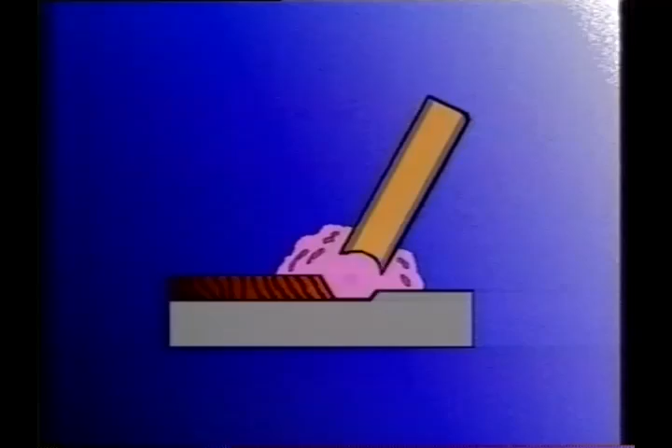To make it easier to locate subjects for review, we've divided this video presentation into 7 sections. First, we'll be looking at the items that are included with the machine and what equipment and supplies you'll need to provide. Next, we'll review the principles and basic theory of gas tungsten and shielded metal arc welding. In the third section, we'll discuss safe welding practices and safety equipment.

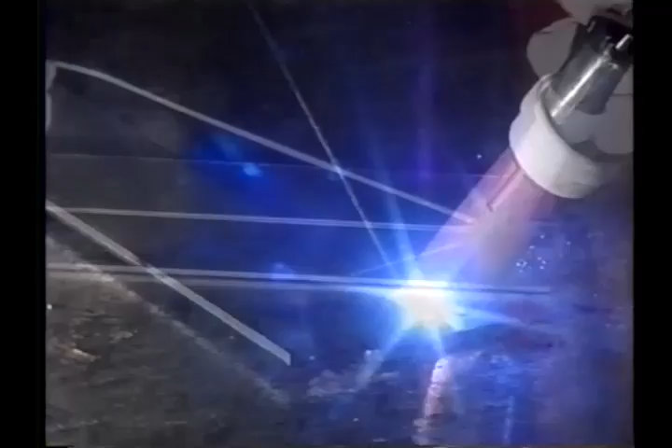In Part 4, we'll set the equipment up, first for gas tungsten and then for shielded metal arc welding. In Part 5, we'll discuss gas tungsten arc welding procedures on mild steel, stainless steel, and aluminum. In Part 6, we'll cover basic shielded metal arc welding techniques. And finally, in Part 7, we'll be discussing equipment maintenance and troubleshooting procedures.

The Miller EconoTIG package includes practically everything you'll need to begin welding. Included is the welding machine itself. The TIG torch has a unique flow-through shielding gas connection. This lets you connect and remove the TIG torch without using any tools. The torch comes with a nozzle, heat shield, collet cap, 3/32 collet and collet body, and a 2% thoriated tungsten electrode. The foot control is used to remotely control the amperage when gas tungsten arc welding and has a 15-foot

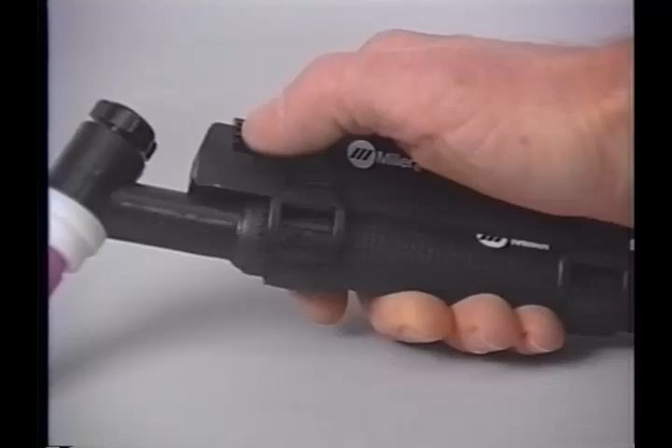cable. For increased mobility, an optional current and contactor control is available that connects to the torch and is fingertip control. The argon regulator flow meter, 12.5-foot gas hose, 12-foot work cable and clamp, and stick electrode holder complete the package. For gas tungsten arc welding, you'll need to provide a cylinder of argon shielding gas. And for shielded metal arc welding, you'll need electrodes suitable for your job.

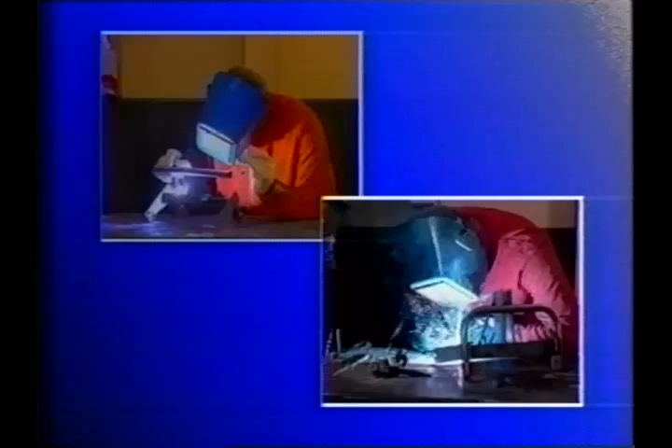In all electric arc welding processes, the heat for welding is created by an electric arc. In shielded metal arc welding, the arc is established between the end of the electrode and the base metal. The heat melts both the end of the electrode and the base metal. As the electrode melts, it flows into the molten weld joint as filler metal.

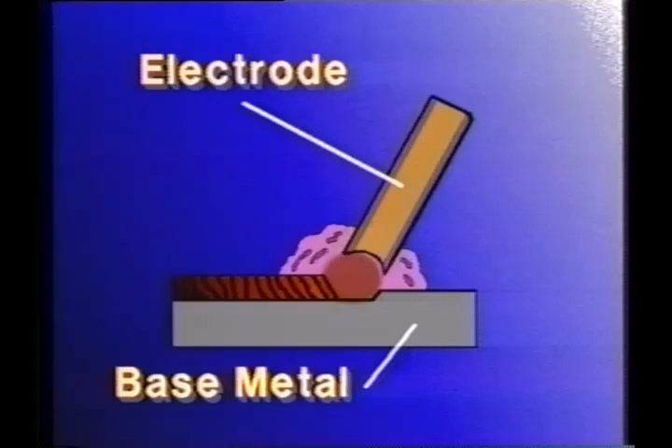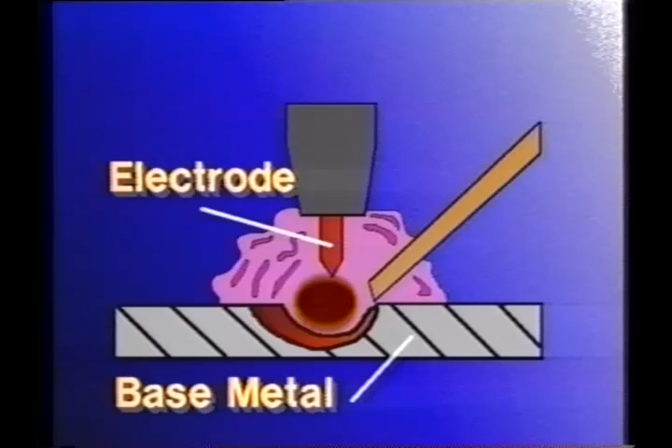In gas tungsten arc welding, an arc is maintained between the tungsten electrode and the base metal. However, the tungsten electrode is not consumed in the weld. On joints where filler metal is required, a welding filler rod is fed into the weld zone and melted with the base metal.

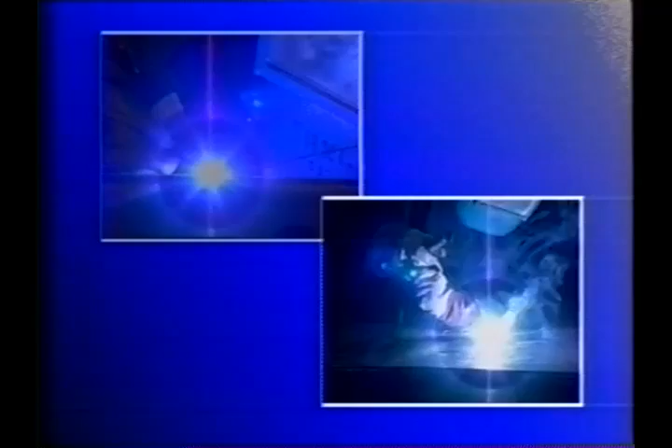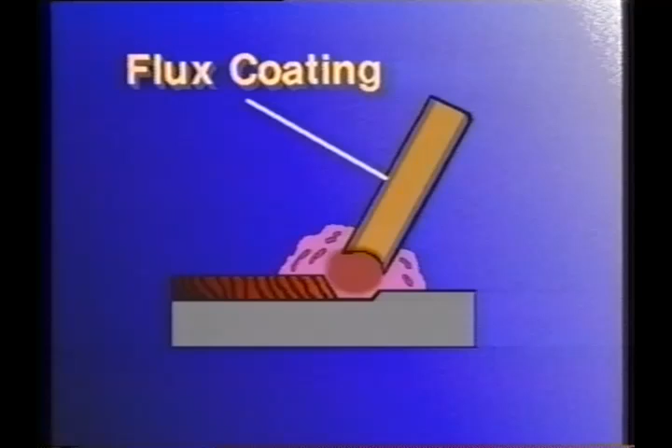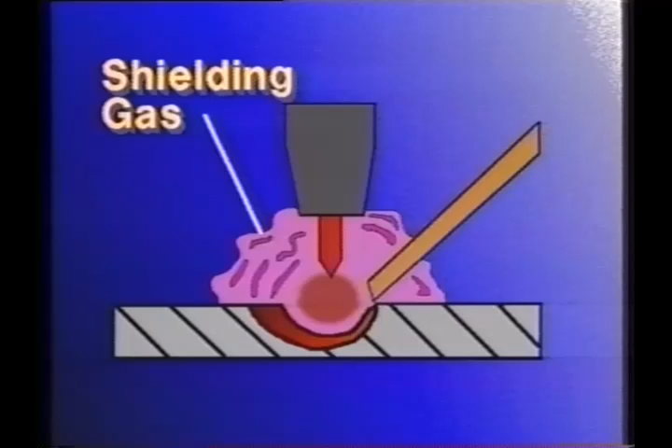In any type of welding, the molten weld puddle must be protected from the atmosphere. Otherwise, oxygen and nitrogen will combine with the molten weld metal and result in a weak, porous weld. In shielded metal arc welding, this is accomplished by the flux coating on the electrode, which melts and creates both a shielding gas and a slag covering for the deposited weld metal. In gas tungsten arc welding, argon, which is an inert gas, is used to shield the welding arc.

When the remote control is activated, the arc is initiated, and at the same time, the gas solenoid in the welding machine opens. Gas flows from the cylinder, through the regulator flow meter, through the gas solenoid, through a hose in the torch cable assembly, and out the nozzle on the torch. When welding current is shut off with the remote control, shielding gas continues to flow for 15 seconds to cool the tungsten electrode and protect the molten weld puddle while it solidifies.

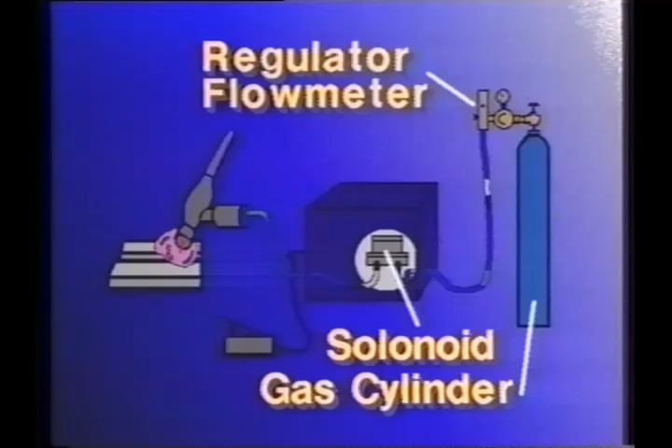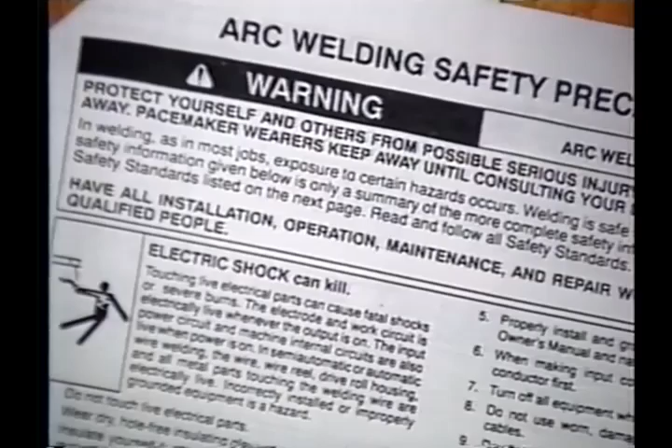Welding is safe when proper precautions and work practices are followed. However, as in most jobs, there are certain hazards you must be aware of. The safety section in the owner's manual outlines precautions that must be taken regarding electric shock, arc rays, fumes and gases, fire or explosion, flying sparks and hot metal, and proper handling and use of shielding gas cylinders. The owner's manual also has a listing of booklets available from various sources regarding safety.

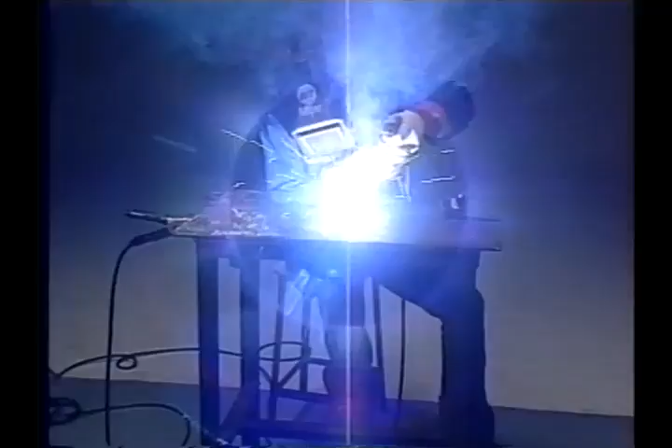The welding arc supplies both heat and light to the work area. The heat is for welding. The light is only incidental. However, it can seriously damage unprotected eyes, so never look directly at a welding arc without proper eye protection.

A welding helmet with a number 11 safety lens for welding on aluminum or a number 10 lens for steel or stainless steel is an absolute requirement. The darker shade lens is required for welding on aluminum because it reflects more light. Proper clothing includes a long-sleeve shirt buttoned at the collar and wrists. A leather jacket, apron, and gloves will help protect you from arc burns and radiation.

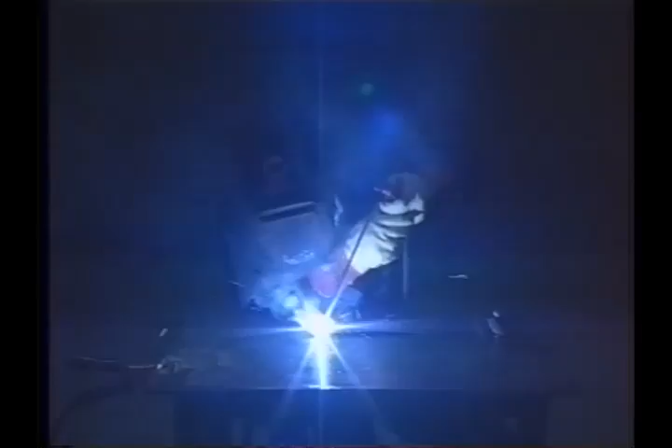Wear high-top shoes or boots and trousers without cuffs. Be sure there is adequate ventilation and that all flammable materials are removed from the welding area. Let good common sense be your guide, and be sure you read and understand all information in the safety section of the owner's manual before setting up or operating the equipment.

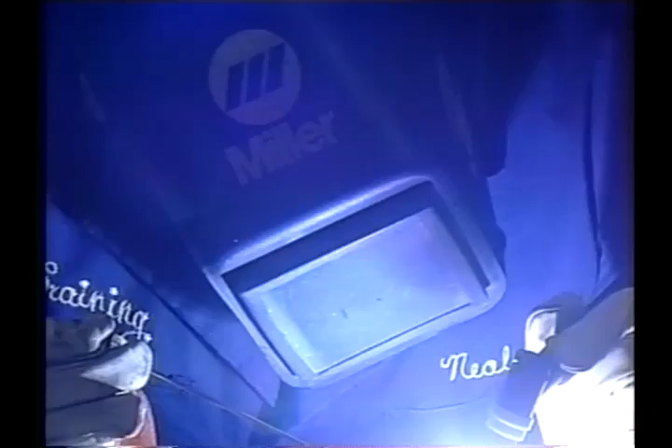In this section of the video, we're going to go through the steps involved in setting the equipment up for welding. First, for gas tungsten, then for shielded metal arc welding.

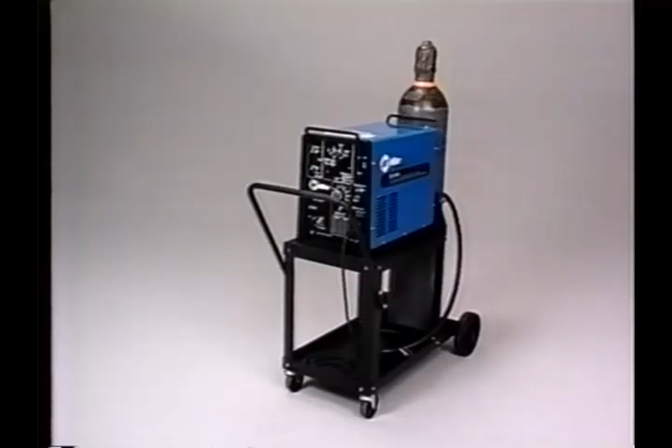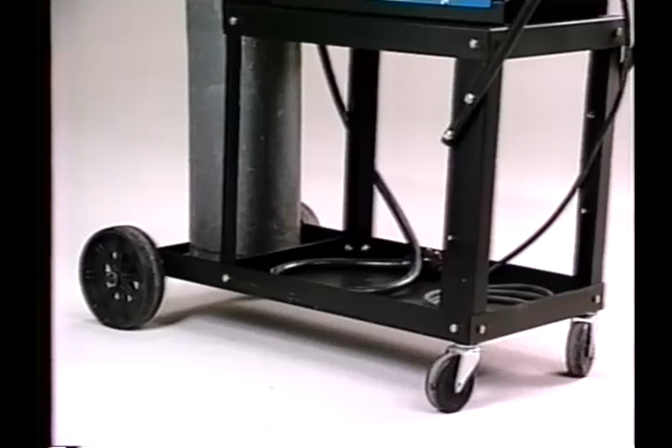We've placed the power source on the optional carry cart and cylinder rack. It makes it easy to move the machine. Plus, there's a cylinder rack support for the cylinder of argon shielding gas, and the bottom tray is convenient for storage. The installation procedures we're going to be covering are outlined in Section 3 of the owner's manual.

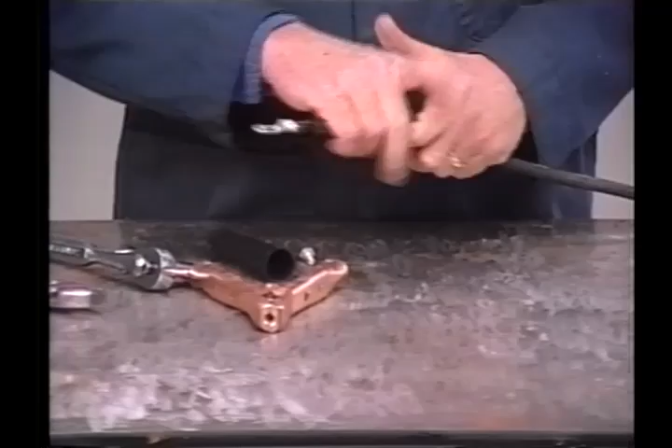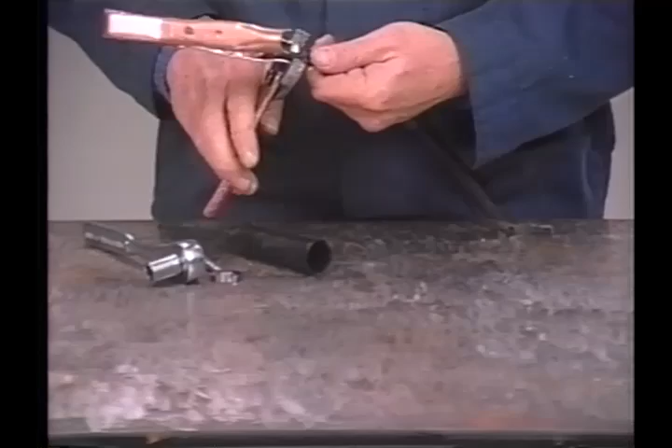To attach the work clamp, slide one of the insulating sleeves over the cable. Use the nut and bolt provided and attach the work clamp to the connector on the work cable. Bend the tabs around the work cable. And slide the insulating sleeve around the work clamp handles.

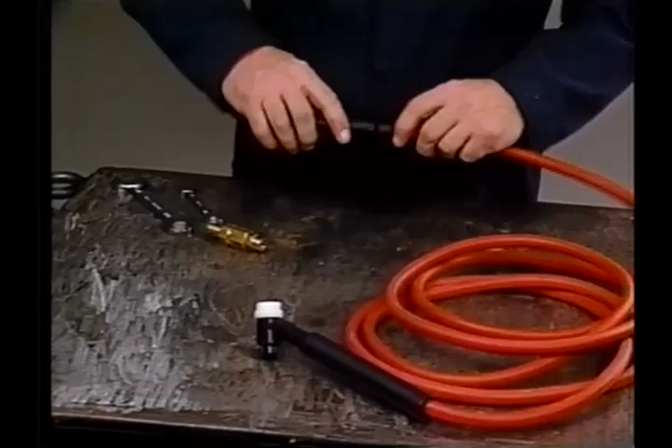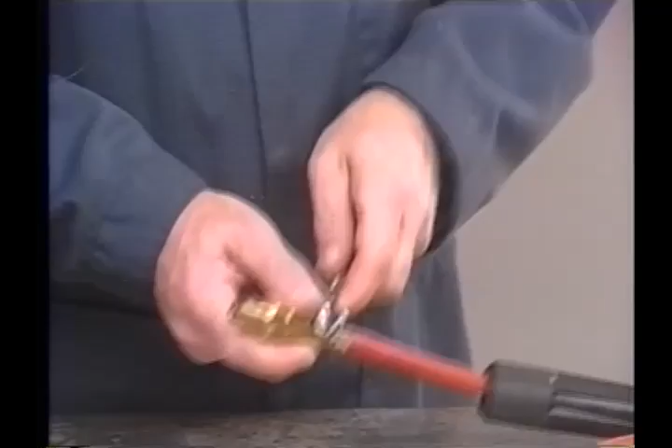You'll need to install the connectors to the TIG torch and electrode cables. Slide the handle over the torch cable. Connect the torch cable to the connector body, and then slide the handle over the connector.

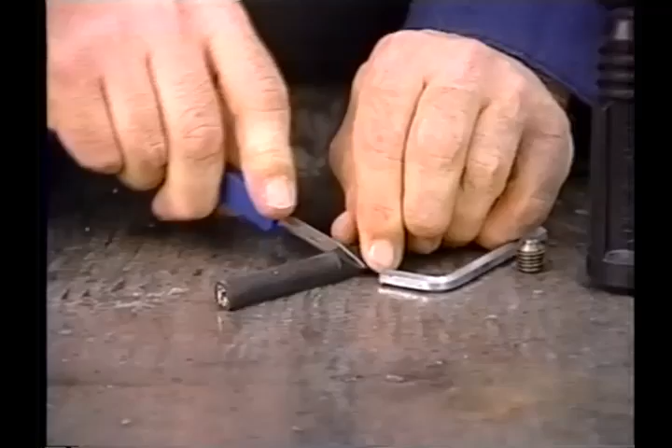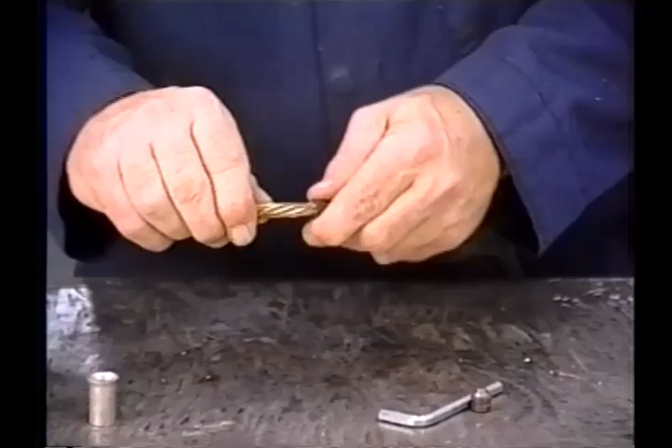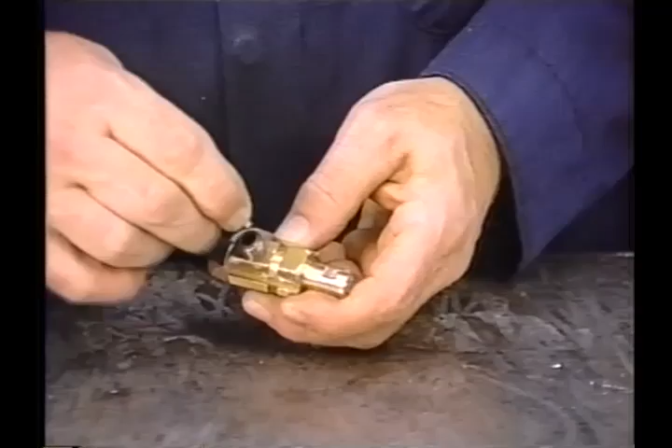The electrode cable connector is assembled in much the same way. Slide the handle over the cable. Strip the cable and install the sleeve fully into the connector body. Tighten the set screw, then slide the handle over the connector.

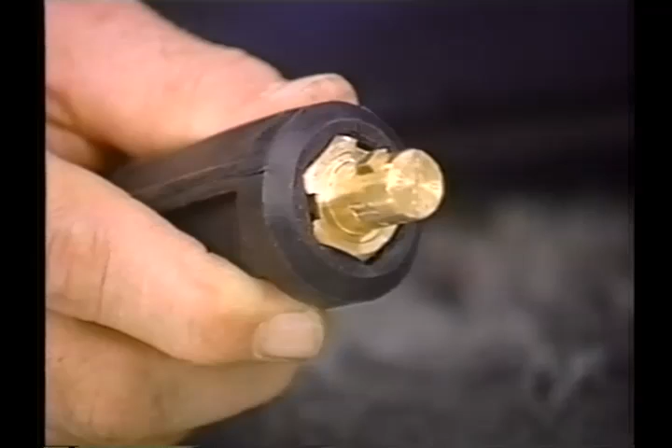When the tungsten is secured in the torch body, it should not extend more than a ½ inch beyond the nozzle. As a general rule, start with an extension of 1 electrode diameter. Joints that make the root of the weld hard to reach will require additional extension.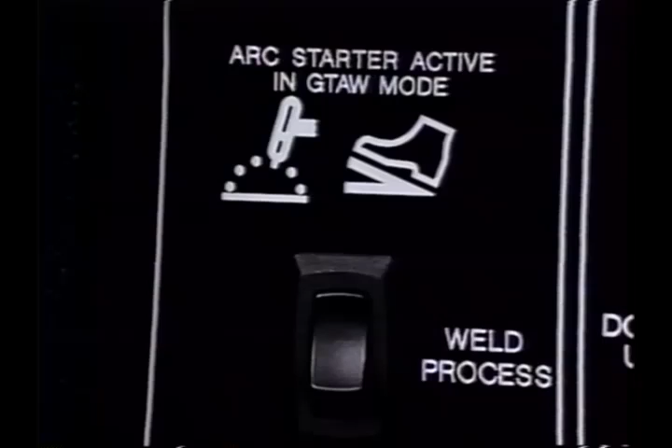For gas tungsten arc welding, the weld process selector switch is placed in the GTAW position. When the switch is in this position, the remote foot or torch-mounted hand control turns on and adjusts amperage in the welding circuit. As the label indicates, the Arc Assist starting system is active when the switch is in the GTAW position. Arc Assist helps start and stabilize the arc. It does not require any adjustment. The remote control is connected to the receptacle on the front panel.

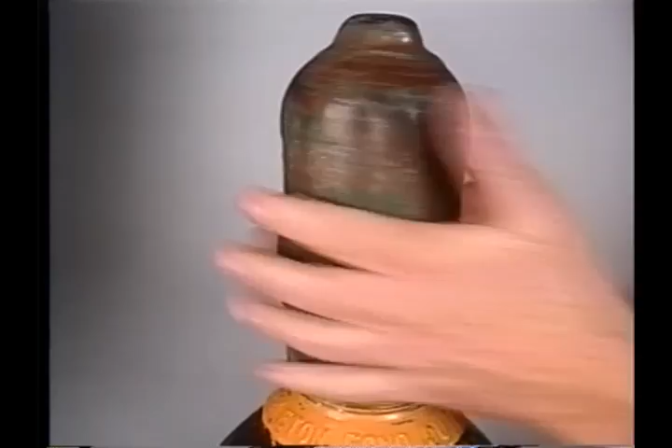Be sure that the gas cylinder is secured to the running gear. Remove the cap, stand to the side, and briefly open the valve slightly. This blows any dust or foreign material out of the fitting. Install the regulator flow meter to the cylinder so the face is vertical.

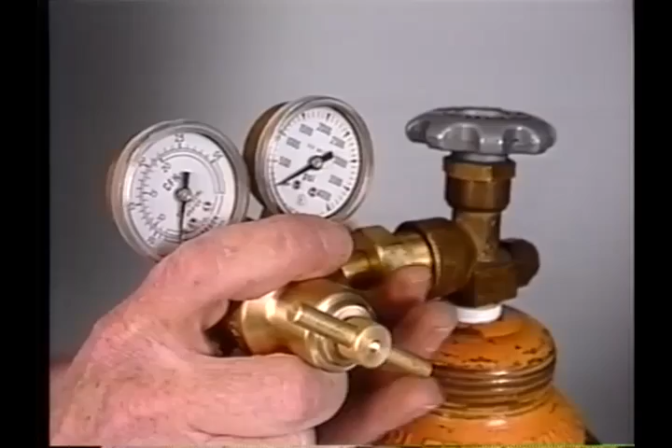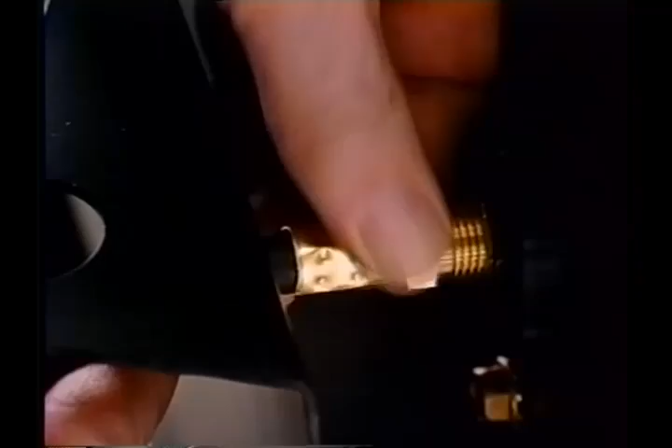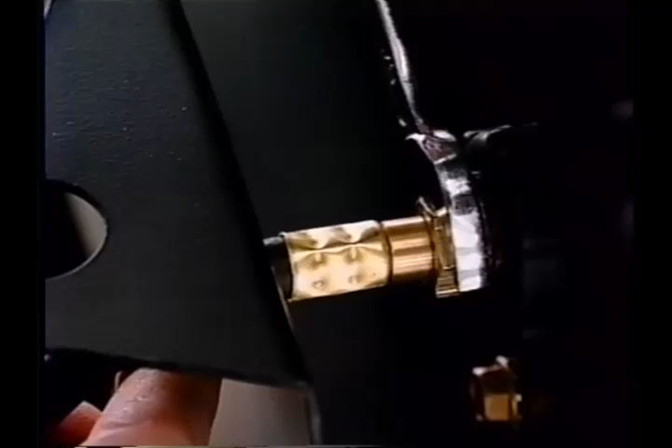Connect one end of the gas hose to the regulator flow meter and the other end to the gas fitting on the back of the machine. Make sure the fittings are tight to avoid gas leaks. The machine is now set up for gas tungsten arc welding.

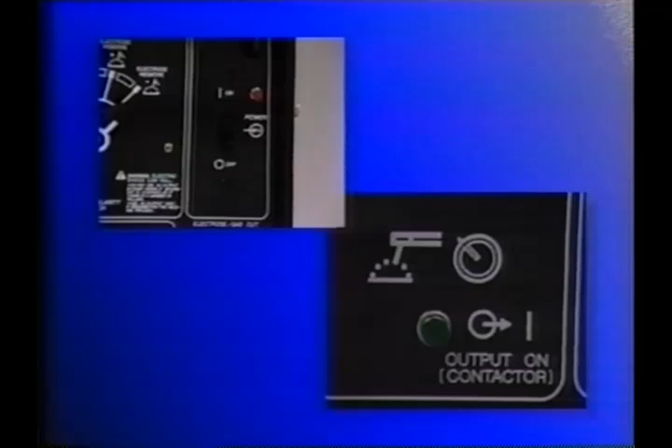To set the machine up for shielded metal arc welding, the torch is removed and the electrode cable is connected to the receptacle on the front panel. For shielded metal arc welding, the process selector switch is moved to the SMAW position. When the switch is in this position, welding output goes on and off with the power switch. And amperage is controlled by the front panel amperage control. We'll be discussing the selections on the range polarity switch in the sections on gas tungsten arc and shielded metal arc welding.

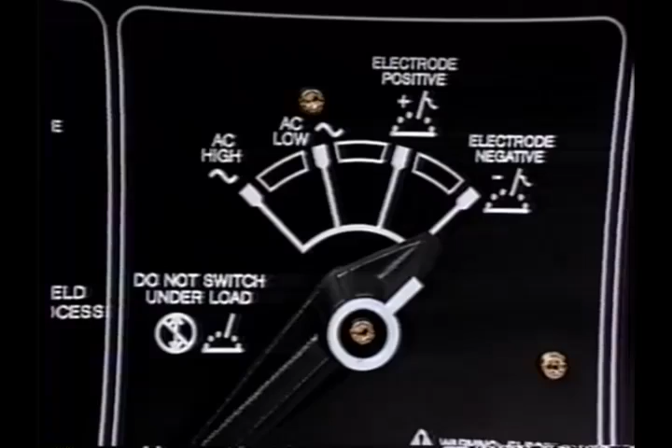In this section, we'll be setting the machine up for gas tungsten arc welding, then making some welds, first on mild and stainless steel, and then on aluminum. The area where the weld is to be made must be clean, and any traces of oxide, dirt, or grease must be removed. Another source of contamination, especially with aluminum, is the filler metal. Use steel wool to remove any oxidation.

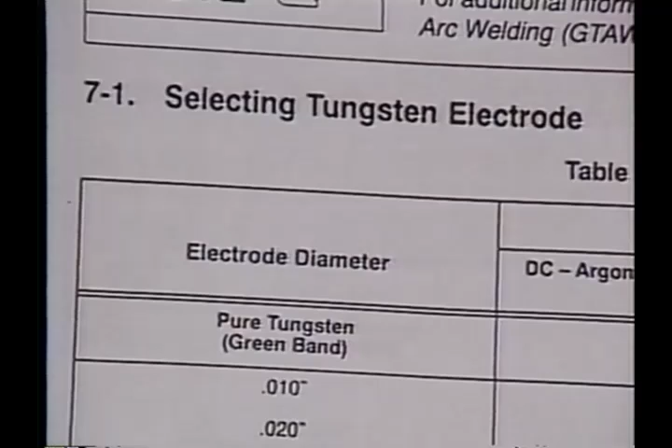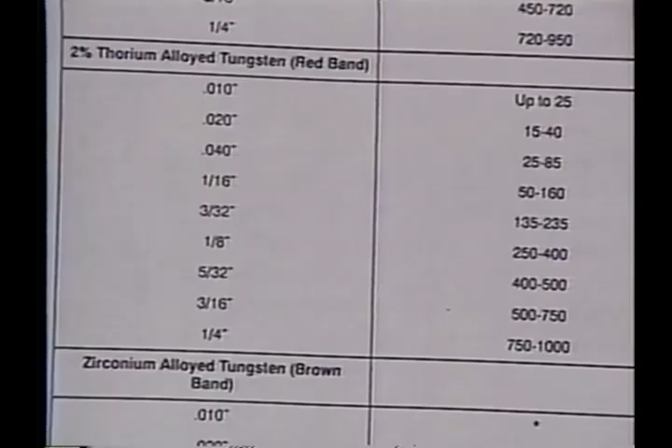The 3/32 inch 2% thoriated tungsten supplied with the torch can be used throughout the AC and DC range of the power source. Generally, alternating current is used when welding on aluminum, and direct current electrode negative is used when welding on steel and stainless steel.

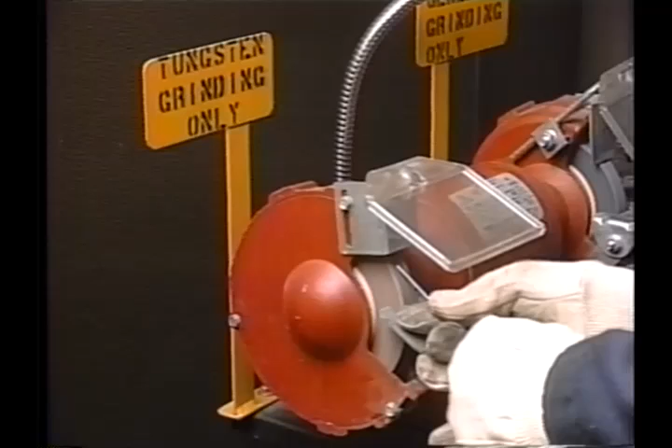The tungsten is prepared based on the type of material being welded. Our first welds will be on steel, so we'll prepare the tungsten by grinding it to a point on a fine grit, hard abrasive wheel. Notice that the grinding marks run lengthwise with the point. This is the correct method of pointing the tip.

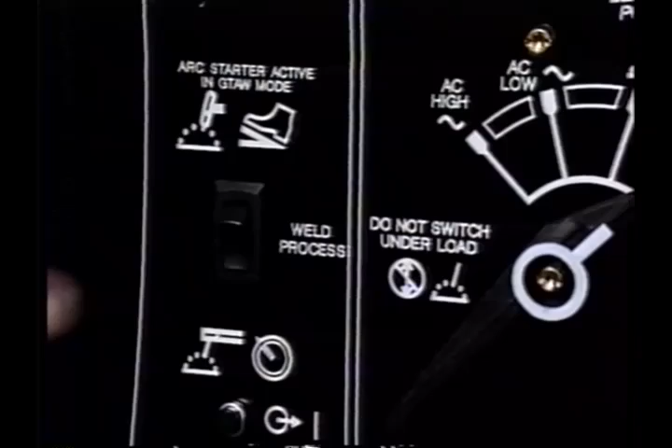Since we're welding on steel, the polarity switch is set to the direct current electrode negative position. The weld process switch is in the GTAW position.

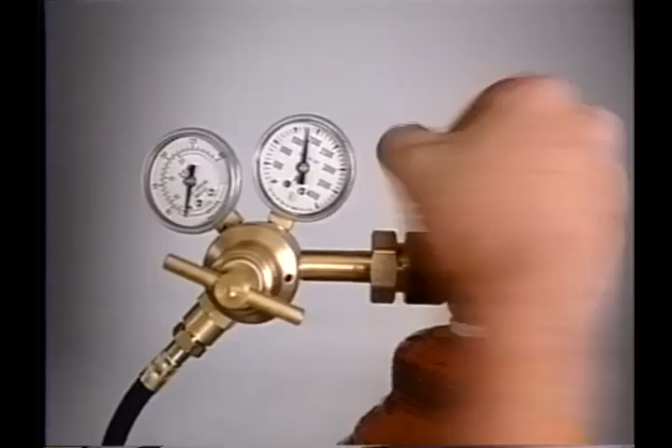Open the gas valve on the cylinder and set the flow meter for approximately 20 cubic feet per hour. You may need to increase this if you're welding in a drafty area. Turn the welder on.

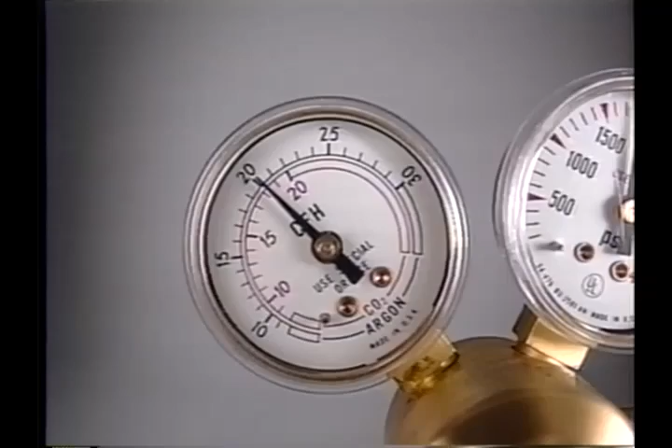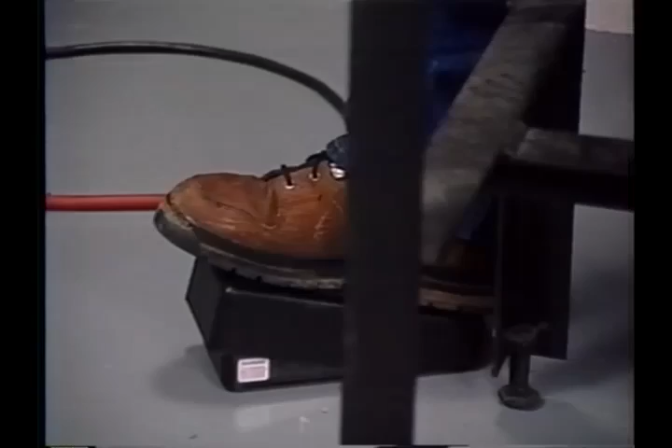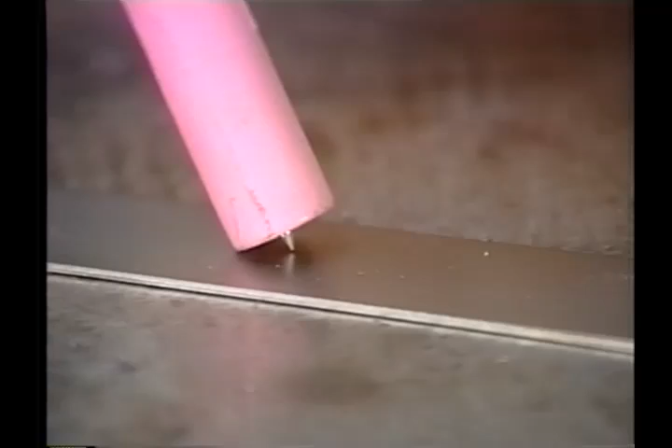To start the arc, position the torch in the joint area. Lower your helmet, and depress the foot pedal or rotate the torch-mounted control if you're using it. If the arc does not start, rotate the cup to move the tungsten closer to the workpiece. A brief momentary touch of the tungsten may be required.

After the arc is initiated, raise the torch to the proper angle for welding. For this outside corner joint, the torch should be at about a 70-degree angle. For this joint on mild steel, filler metal is not being added. Simply control the amount of heat with the foot control and let the edges melt and flow together.

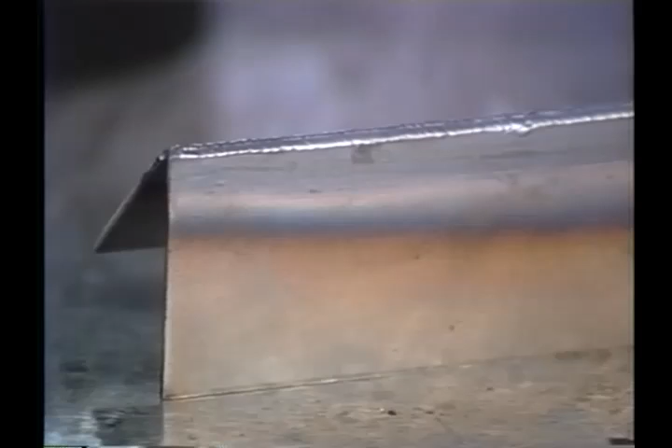Looking at the finished weld, we see that the edges are fused and that the ripple patterns in the bead are uniformly spaced.

On joints that require additional filler metal, such as this mild steel lap joint, establish a puddle of the desired size and begin feeding filler rod into the leading edge of the puddle. Hold the rod at approximately a 20-degree angle so that the tip is heated by the arc, but final melting and transfer of metal occur when the rod is dipped into the weld puddle.

To avoid atmospheric contamination, make sure you hold the hot tip of the rod in the protective envelope of the gas shield.

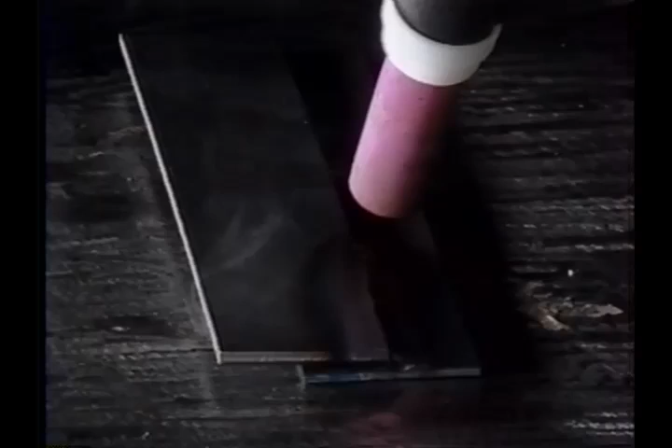Hold the arc length to about 1 electrode diameter and travel at a speed that will produce a bead about 2 to 3 electrode diameters wide.

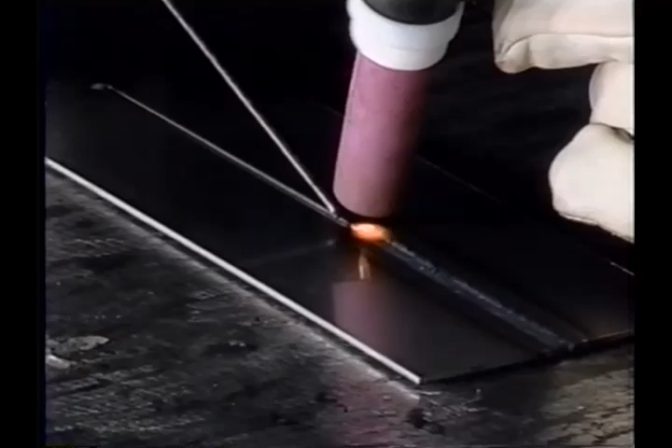To finish the weld, the torch angle may be decreased to help in filling the crater. Add enough filler metal to avoid an unfilled crater, since cracks often begin in a crater and continue through the bead. The ripples are uniformly spaced, indicating correct travel speed, and the bead is the correct width.

Before welding on aluminum, we need to form a ball at the end of the tungsten electrode. This is done by striking an arc with the polarity switch in the direct current electrode positive position. This is the only time electrode positive is used while in the GTAW mode. The ball at the tip should be about 1.5 times the electrode diameter.

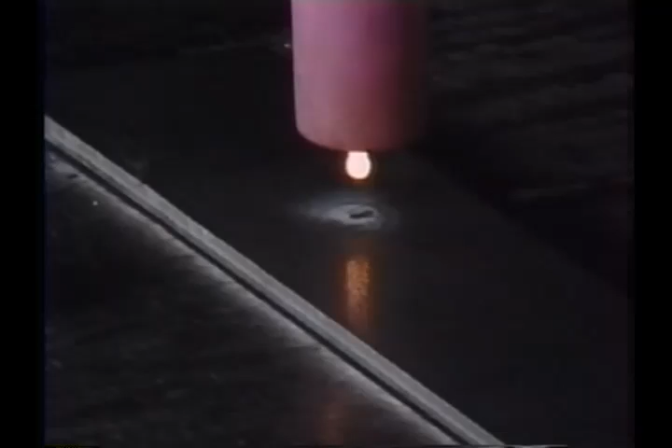When you're welding aluminum, watch for the puddle to become shiny, then start adding filler rod.

Looking at this properly made butt weld on aluminum, we see that buildup is correct, that there is good penetration, and the bead edges are fused in.

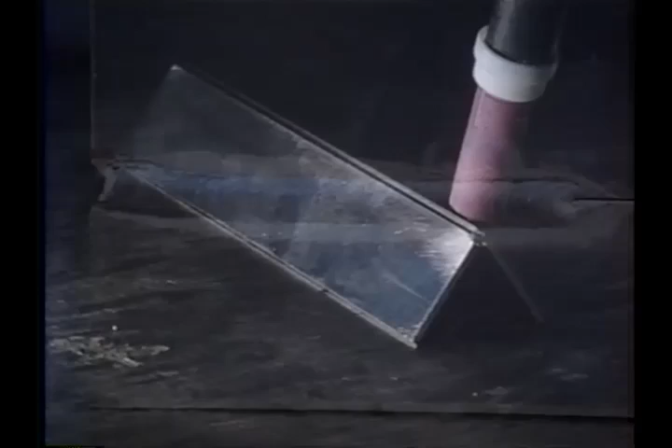Aluminum is a very good conductor of heat, so on small pieces, the entire part may heat up to a point that requires reduction of amperage from the original setting.

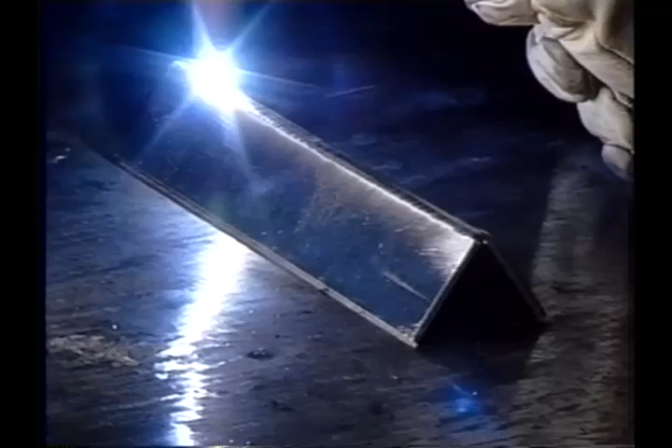The foot-operated amperage control will help in the finishing of the bead, since amperage can be lowered to decrease puddle size as filler metal is added.

Switching the machine over for shielded metal arc welding takes only a few moments. Disconnect the torch from the front panel and connect the electrode cable.

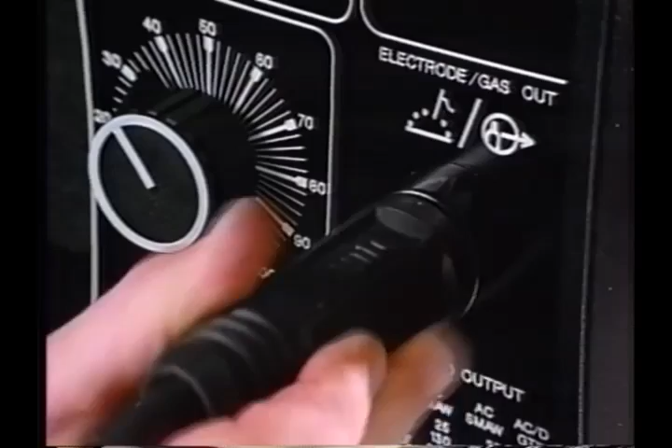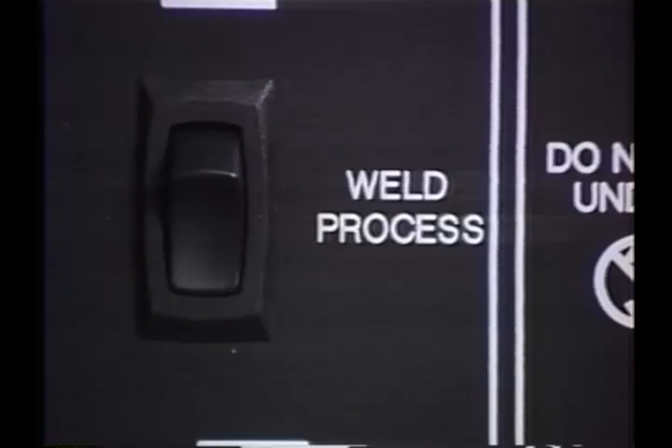Select the proper polarity, direct current electrode positive. Move the process selector switch to the SMAW position. Remember, when the switch is in this position, the output goes on and off with the power switch. When the switch is in the SMAW position, the remote amperage control is out of the circuit, and amperage is set with the amperage control on the front panel.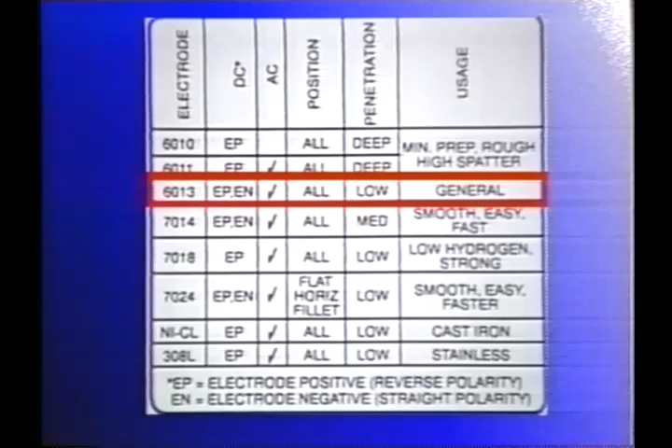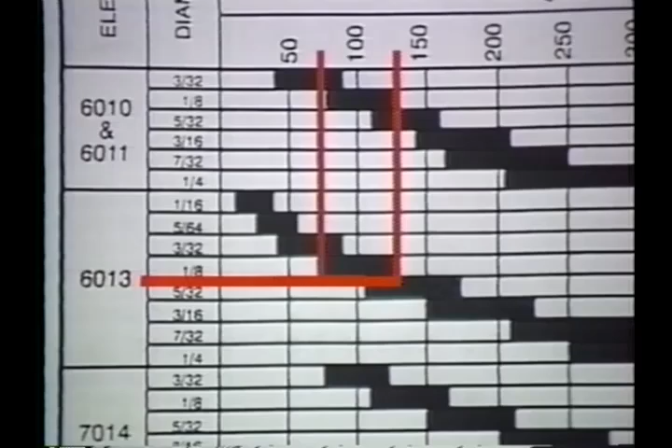1/8" diameter E6013 electrodes are a good choice for general purpose stick welding. The electrode and amperage selection chart in the owner's manual lists the suggested amperage range for various types and sizes of electrodes. As the table suggests, the amperage range for an 1/8" E6013 electrode is 75 to 125 amps. As the chart on the machine indicates, setting the amperage control at 85% will give you approximately 100 amps in the direct current range. Put the electrode in the holder.

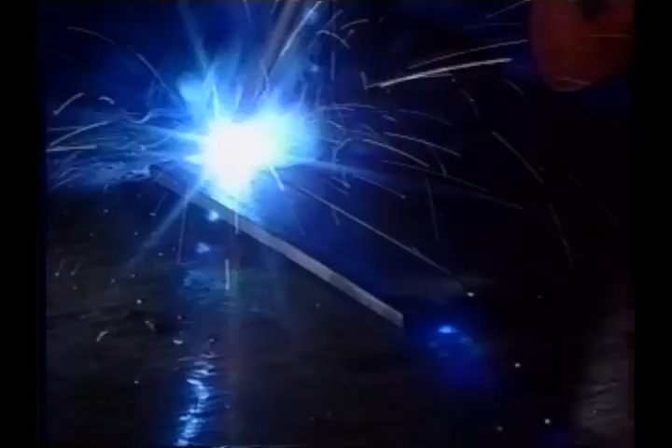To start the arc, drag the electrode across the workpiece as if you were striking a match. As you're making the weld, tilt the electrode about 10 to 30 degrees in the direction of travel. Maintain an arc length, that's the distance between the end of the electrode and the workpiece, equal to the electrode diameter, in this case, an 1/8".

If the arc length is too short, arc voltage will be low and the electrode may freeze to the work. If arc length is too long, arc voltage will be high and excessive spatter can result, in addition to poor control of the arc. The proper arc length will give off a characteristic frying or crackling sound.

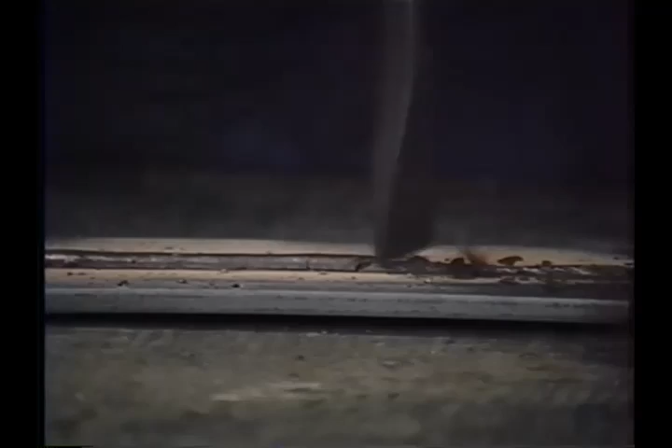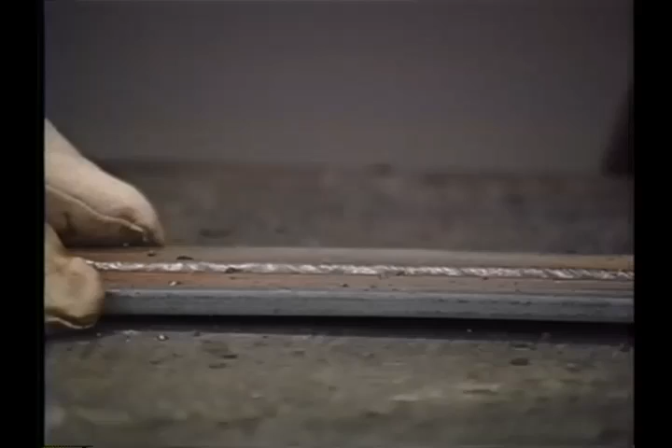Use a chipping hammer and wire brush to remove the slag from the weld. The shape of the weld ripples and the bead width are good indications of correct travel speed. A bead approximately 1.5 times the width of the electrode, which shows half-moon-shaped ripples, indicates correct travel speed.

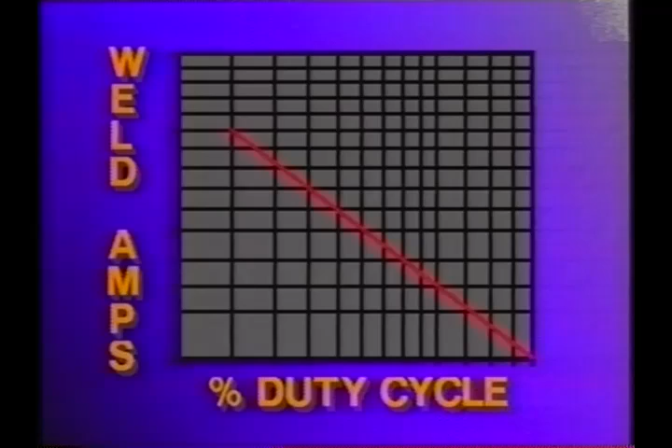This machine is designed for light-duty operation and is rated at 150 amps for gas tungsten arc and 130 amps for shielded metal arc welding. And it has a 20% duty cycle. The duty cycle is the number of minutes in a 10-minute period that the machine can be operated at full rated output. A 20% duty cycle then means that the machine can be operated at rated output for 2 minutes out of each 10-minute period. When operating at amperages less than rated output, the duty cycle increases, so this usually isn't a limitation.

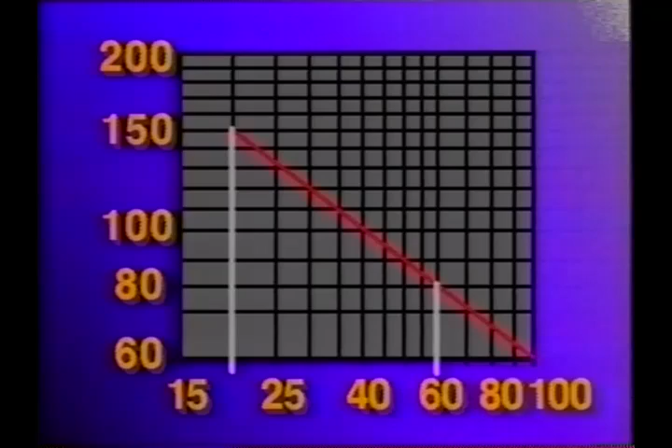In the event the transformer does overheat, however, welding output will be shut off, and the high-temperature shutdown light will come on, and the fan will continue to run. When the light goes off, you can resume welding.

There's some routine maintenance procedures that are performed each 3 months. Be sure that the power source has been turned off and the input power disconnected before inspecting, maintaining, or servicing the machine. Any damaged cable should be taped or replaced. Check to see that all labels are readable. If not, they should be replaced.

Check the O-ring at the torch receptacle. If it's cracked, it should be replaced. At the same time, inspect the torch body, torch cable, and gas hose. Damaged or badly worn parts should be repaired or replaced. Each 6 months, remove the wrapper and blow out or vacuum dust and dirt from the interior of the machine.

If you're having a problem starting the arc, check that all connections have been made. Remember that the welding circuit must be complete and all connections properly made. If porosity is a problem, first check to ensure that the material was properly cleaned before welding. Then check the shielding gas supply to be sure that there is gas in the cylinder, that the flow rate is set correctly, and that all gas hose connections are secure. If the arc seems different than usual, check to see that the polarity switch is in the correct position.

TIG welding is probably the most difficult welding to master and will require many hours of practice to become proficient. Remember, proper cleaning of the workpieces prior to welding is essential if welds of good quality are to be made. Cleaning with a chemical solvent is usually sufficient. Be sure you completely remove all oxide, oil, grease, and other foreign material from the work.

Remember that the information presented in this videotape is designed to supplement the owner's manual. Follow all instructions in the owner's manual, particularly in the safety section. Refer to the illustrations in the owner's manual for help in solving related welding problems. Remember that your welding distributor is ready to assist you and provide technical information should you have a problem.